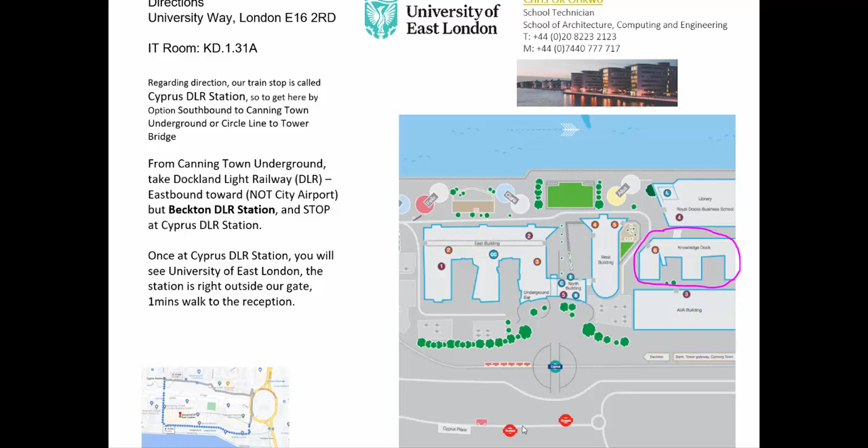Directions, you don't need directions. You have already been there, Patricia, so I don't need to explain where that is. But what I'd like you to do, I don't know if you've got access to these materials, and don't worry about it, I can bring them anyway. For the sketch exercise, you need to bring a layout pad with you, a couple of pencils and some fine liner pens, and a couple of colour marker pens, probably a light yellow or a grey, and that would be brilliant.

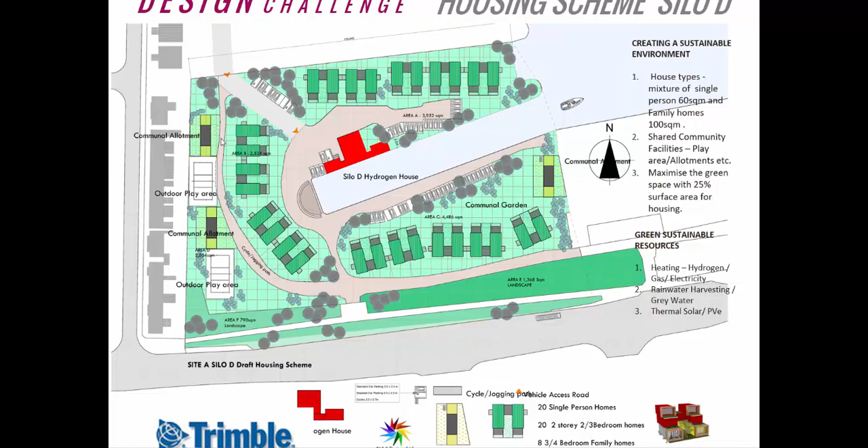Okay, but what we'll end up doing is, this is the site that we looked at last week, and if you remember when we plotted the site out, we had these community gardens. We had 1, 2, we had 3 of them. So what I've done is I've highlighted this one area here itself, and today what we're going to do, we're going to model that up.

So if you want to practice anything beforehand, there's an A4 PDF, and I put a 2-meter grid onto that. I put some scale stuff on there so you understand about sizes and everything else, so you can actually scale out and sketch out your ideas. So like everything else that we do, before we start modeling, we need to actually formulate our ideas on paper first.

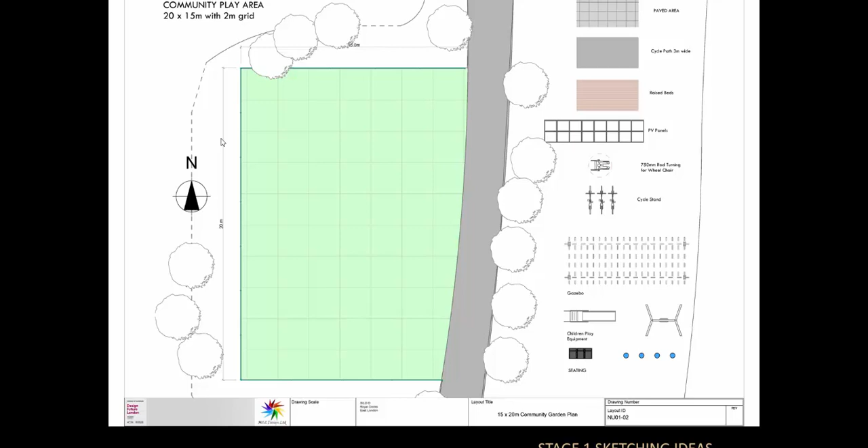So what we're going to do today, we're going to go into SketchUp, we're going to create a community garden. So we're going to have buildings, we're going to have some planters in there, but there are things, when you're designing a community garden, that you need to consider. One of the factors, obviously, we need to create a toilet in there that needs to be compliant with the DDA regulations. We need to consider having washing machines, so we can service that by having grey water and rainwater harvesting.

So by having a sedum roof on the building itself, we can use that to control the water flow when it does rain. We can also use the raised planters to gather the water up, and then we can feed that into an underground tank. We can also include things like permeable paving, so again, it allows for water to filter through. We can create spaces for cycle stands, add some benches and seating and probably a gazebo, and include a children's play area, all within that zone itself.

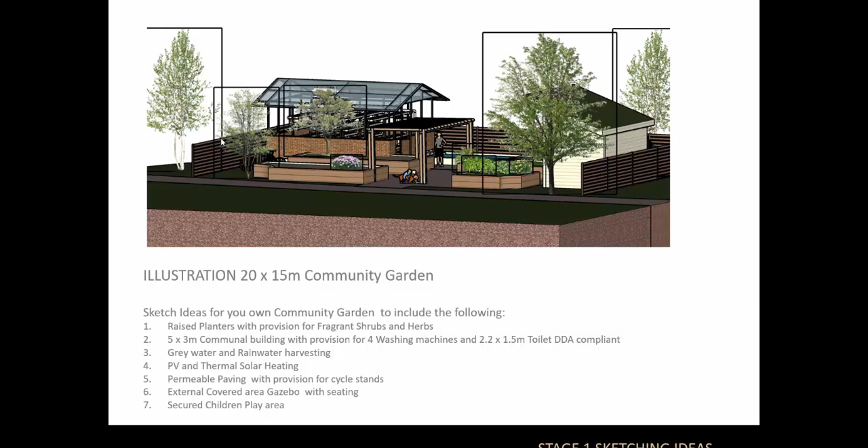So, this is one little idea that I came up with, where we have our bike stands, we have our footpath, we have our planters. At the end here, I've got some PVs, solar collectors, and underneath these planters are a series of rainwater harvesting tanks that will gather the water up, and therefore we can use that for flushing the toilets and for the washing machines. And likewise, we can take the water from the washing machines and also use that for flushing the toilets as well. So the whole thing literally becomes self-servicing in a lot of senses.

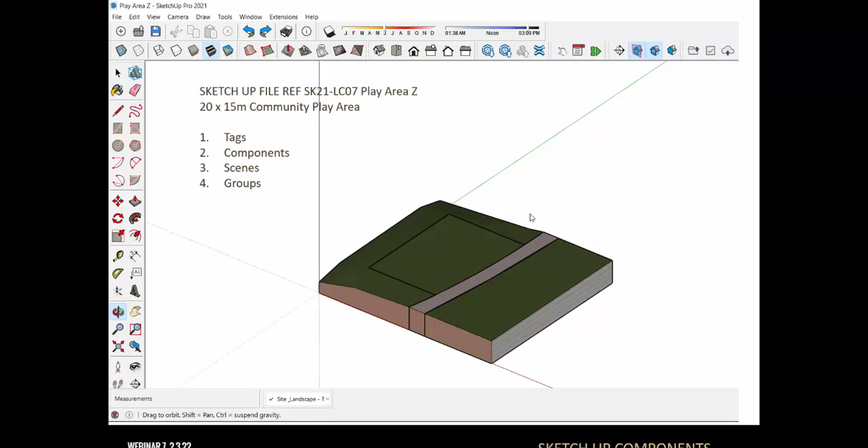So where we're going to start off with, there is a model file which I've created, which has got the area, the rectangle here, which is 15 meters by 20 meters. There's a footpath on the model itself, and then put a bit of landscaping around the space. And so what we're going to do, we need to look at the tags, the components, the scenes, and the groups. First thing that we need to think about is to just check the model information is correct.

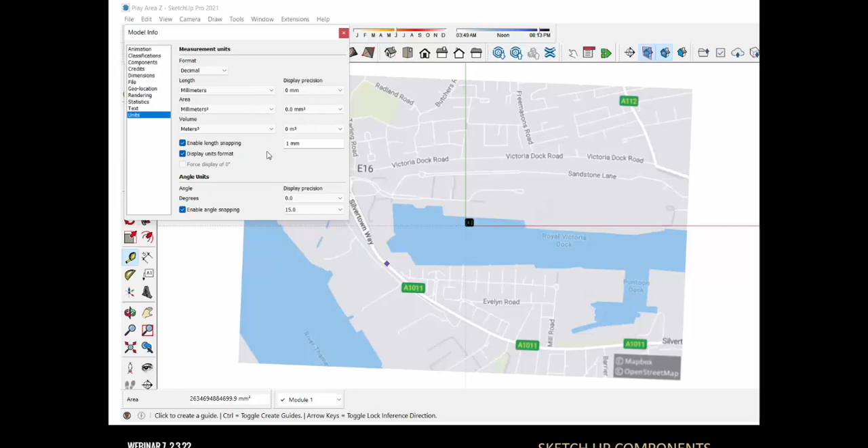And so by going into model information and going to the units, we can change the format to decimal, and then we can choose the lengths, the areas, and the volumes. And then we can actually decipher the precision for each of those.

Other things that we can do is we can actually focus on the geolocation, so that when we are doing analysis, we can actually bring our model and pinpoint it exactly where it wants to be from a geological point of view. And so by going on to geolocation, we can actually type in the area that we want to, it allows us to scroll into it,

and then you can see here is the Docklands area itself. Our site area is down here, so we'll just simply drag it so that it positions it within our model, and then we'll just add that to our model itself. And so we can actually create that within the model itself. It's there, but we can control the tags. We can actually lose it within the tags, so we can control exactly what we're seeing.

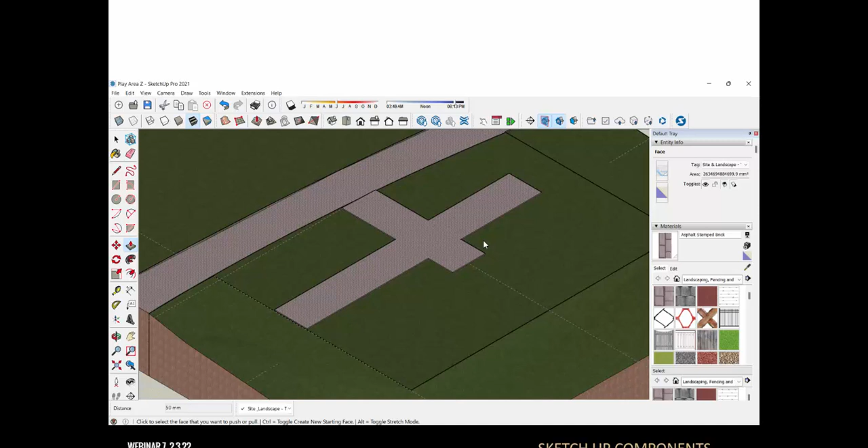So the first things that we're going to start doing is actually modeling up where the footpath's going to be. So by using the tape measure, we can define where the center points are, and then we can use the pencil tool to actually set out where the footpath's going to be. And then we can elevate the footpath up, and then add the material to it, and then we can actually do a little bit of stretching to extend exactly where we want it to be.

So we go through this kind of process where we can have this kind of space. So my footpaths are all 2.4 meters wide. I've got a length down one side which is about 9 meters. I've extended out the other side by another 3 meters. So that's the kind of thing that you can do. Then you can put it out from there.

To create the planters, again, we can use the tape measure tool to actually define our setting out points. We can extract areas out, and then once we've got the planters itself, we can then elevate them up. But before we do that, we might want to do a bit of editing to get the shape right. So we might start off with a rectangle, but we can actually turn them into different shapes.

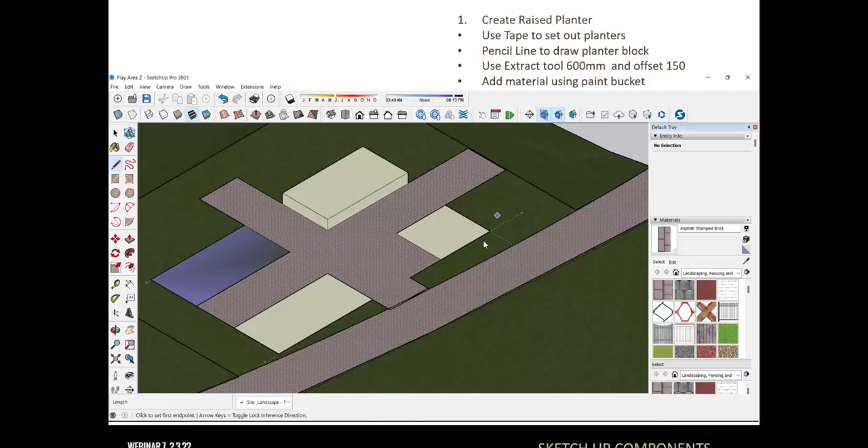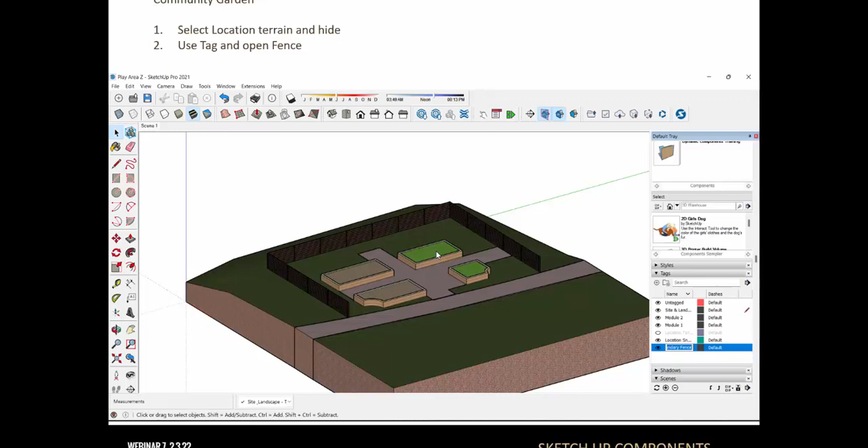And so if you look at the illustration, I have 4 planters here. These two have this kind of curved end, and the other 2 are left rectangular. And so by extruding it and then using the offset tool, we can then create the planter and then just apply our materials to it.

Importing materials is basically by going into the 3D Warehouse. So for today's exercise, I've gone for a playground, and so literally by going to the 3D Warehouse, typing in play equipment, selecting the one you want, you can import it directly into the model itself.

So likewise, we can then create all this. We can use some objects, which I've already created and put into the base file itself. So for example, the fencing that goes around, I've already dropped that in. This little tiny building, this little gazebo, I've actually created and added that to the base file. So it just saves you from having to do that.

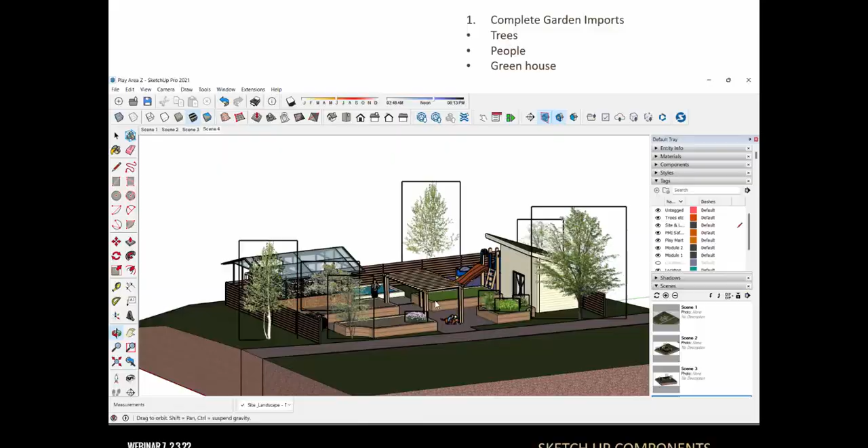And then we can go into the scenes and we can create 4 scenes, so we can actually view through it, and that will then compile our composition for our model. Okay, I'll come back to this little video at the very end.

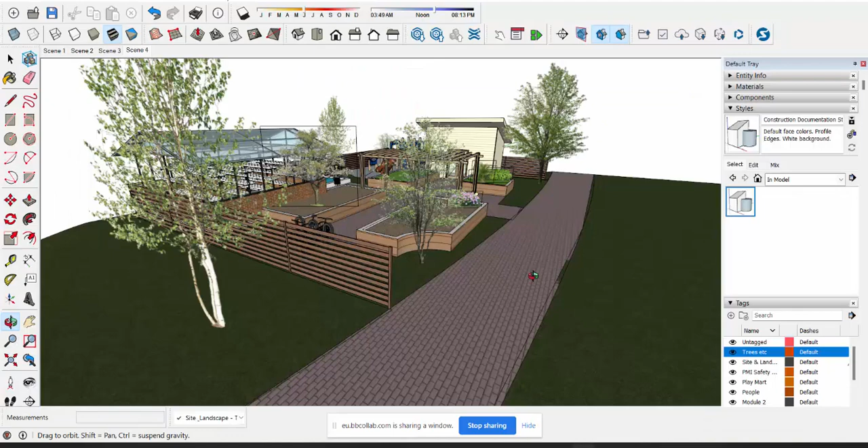Okay, so let me just end that show. Let me come into, right. So here is our completed model that I've created.

So what I'm going to do is, if we look at what we have, we've got a series of layouts, and if I rotate through, we have all these trees. Because they are 2D objects, they're always designed to face the camera. So as we rotate, those trees will always face the camera at all times.

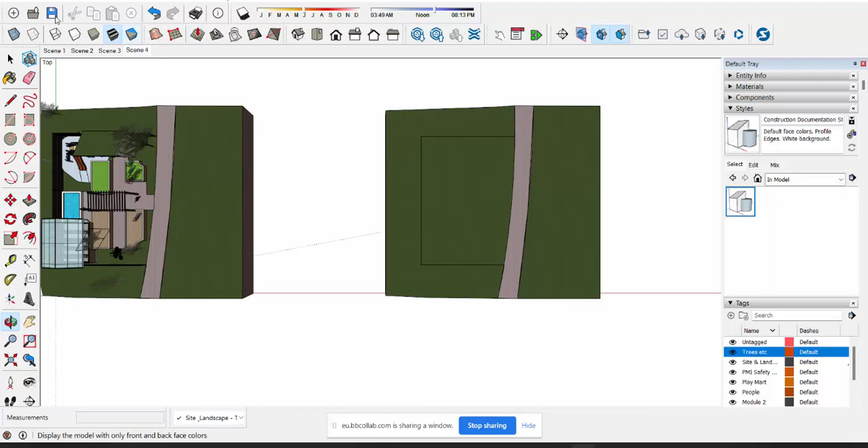Right, so we're just going to go to the top drawing. There's my finished model, and here's one, as you say, that I created earlier. I'm just going to go back to my camera tool and drop into parallel projection, so I'm looking directly on the top. Let me go through a little bit of basics, which I talked about earlier on. One of the things we need to check, particularly when we import a model, is that the settings are correct for it.

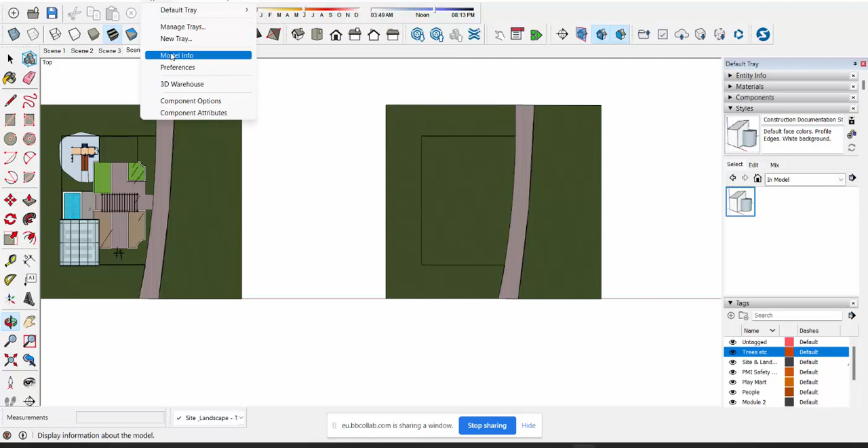So if I go into Window and into Model Info, you can see there are things we can adjust. We have the Dimension tool, so I can choose the dimensions. On the Dimension tool we need to make sure they are always aligned above the line. Sometimes in America they have it underneath or through the middle, but here in the UK the dimensions are always above the line.

The other thing regarding the units is to make sure of the units we're using. The default might be architectural, but if I go into architectural, you see everything is imperial. So I need to change from architectural to decimal, and now I have lengths in millimeters, areas in meters, and volume in meters. Let me just change that to meter square, and then levels of precision. To be honest with you, when you're working in millimeters, you don't need to go 6 points beyond it. It's not necessary. So we can focus on each of those and set it up properly.

The other thing we need to think about, particularly when we start carrying out analysis of the site itself, is that we can select the location. We can click to clear the location, add more imagery to the location, or set that location. I'm not going to go into that right now; we can touch on that in more depth next week in the workshop.

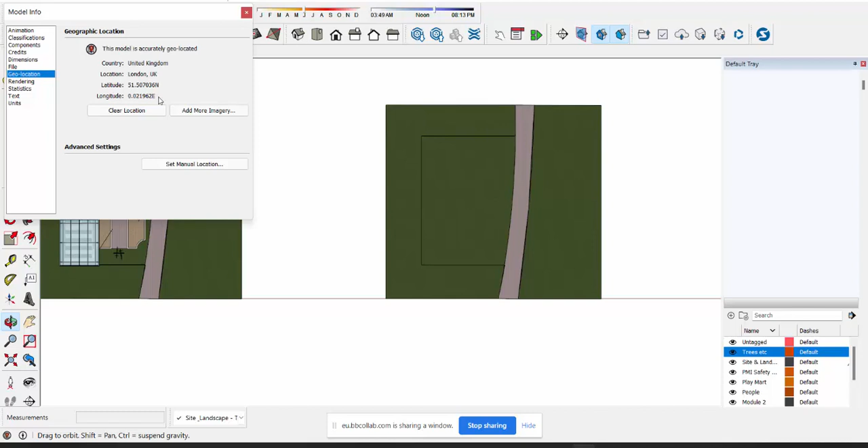But predominantly, this is critical. Regarding the site we've selected, you can see we have a latitude and a longitude setting. When we carry out sun studies and environmental assessments, that is vastly important. If we don't have that, then it's not in the right place. So that's just a couple of things regarding the model info.

Right, okay. So let's start modeling up this site a little bit. I'm going to run a couple of dimensions on the side just to show you what we have. Let me click dimension and bring it to there. It's 14.2 meters. It's always good to check your dimensions. So it's fairly accurate. I want to use that for check purposes. Don't keep your dimensions on. Literally, just get rid of them. So that's the first thing.

The second thing I want to do is get a center point. If I use the tape measure tool, you can see it picks up that center point, and then I can pick it up from there to there and bring a line across. So I can judge where my center points are going to be from my model at any one time.

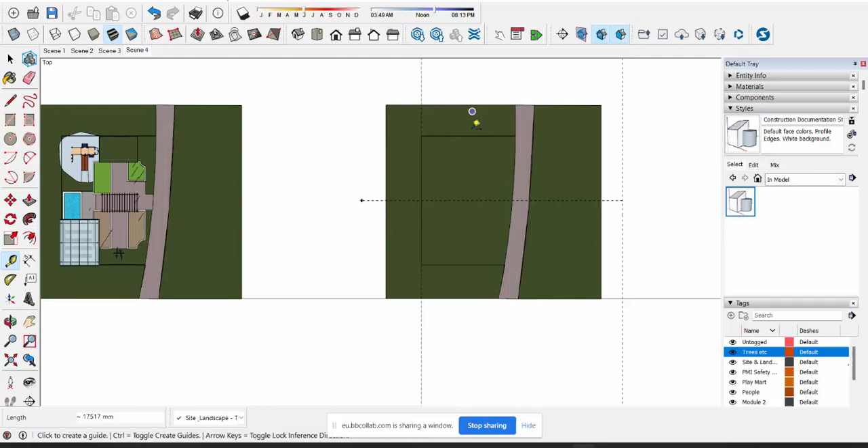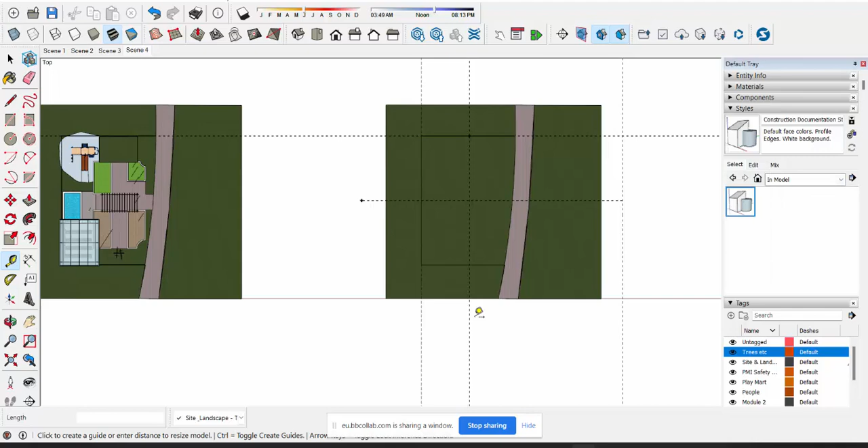I can be specific. I can come from the edge and say, right, let me come in 7500 and type enter. It's giving me my center point from there, and I can bring in my next center point from there. So there are two ways of bringing dimensions in, and that's because I want to have a footpath that's going to be within the center of my model itself.

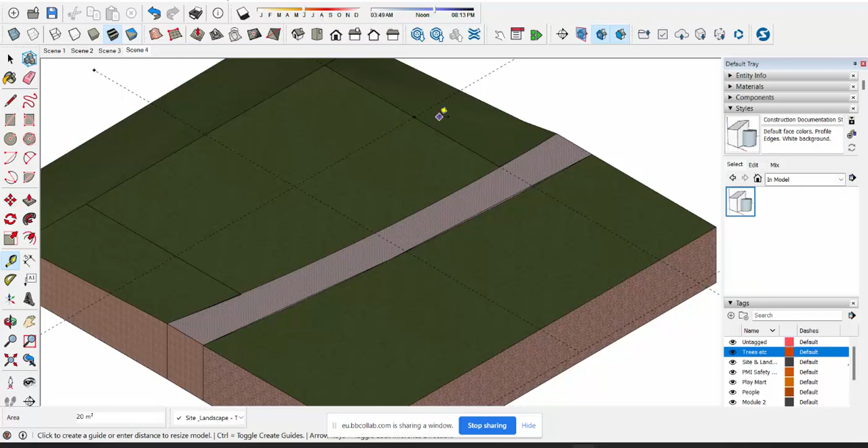So if I look at this in 3D view, you can see we have these default lines that I can model through. Now I can keep in 3D, or I can go into 2D, back to the plan view, and apply my pen line.

So if I go to the pen line here, if I start from this point, let me come along the center point there of 1,200 and hit enter. You can see now I'm going to use my green lines. That line there is 9.9 meters long.

So I can come to that point itself. Let me come way beyond that, some in the region of about 16 meters that way, and 0, enter. I'm going to come back with a dotted line, come on again, another 1,200, enter. Consequently, this gives me my space.

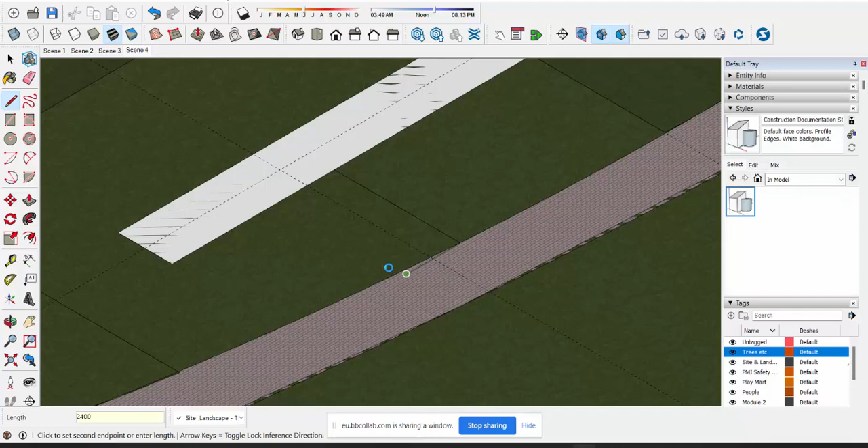Okay, let me continue. Let me come on this side, 1.2, from there to here. I'm not too concerned about overlapping the footpath, 2,400, enter, and then I can go back from there to get into the edge.

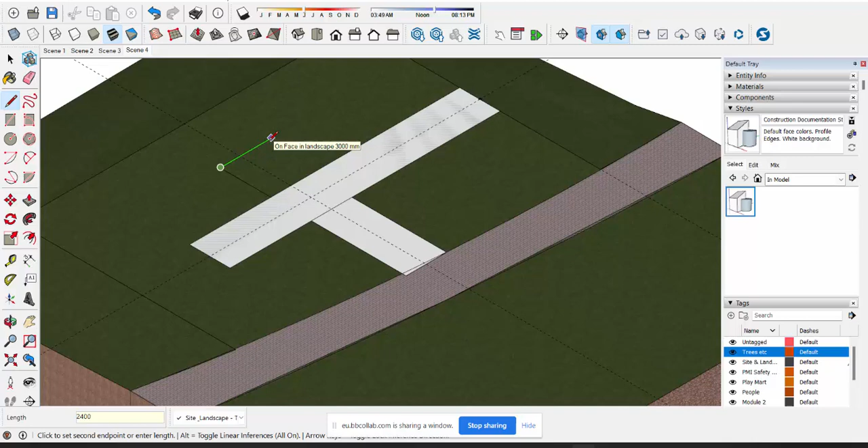Again, I could come up the back end, so let me come up the back end here of 3,000, enter, let me come through, 2,400, enter. So consequently what I'm doing is being quite specific regarding the shapes I've got. If I decide to erase that little line, that little line, and that line, it gives me this kind of shape.

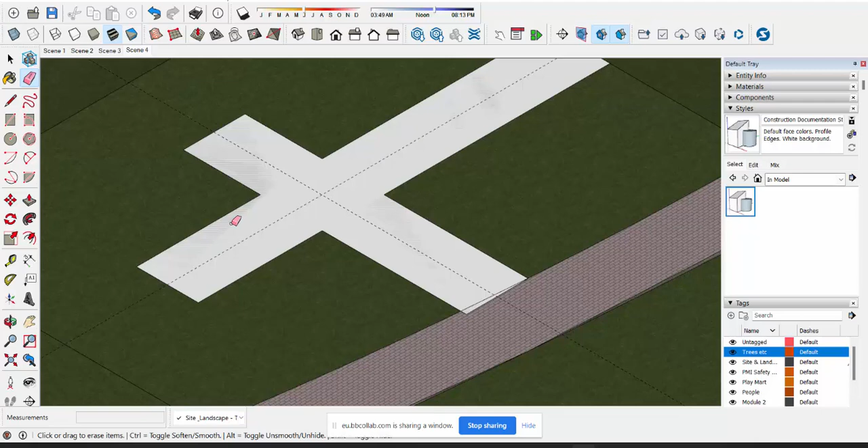If I choose, I want to actually curve the end a bit. I'm getting very cocksure with myself here now, and there you go, I can put a radius onto the end. So you don't need to be in squares, but one thing you do need to make sure is that when you extend spaces, you do extend them through.

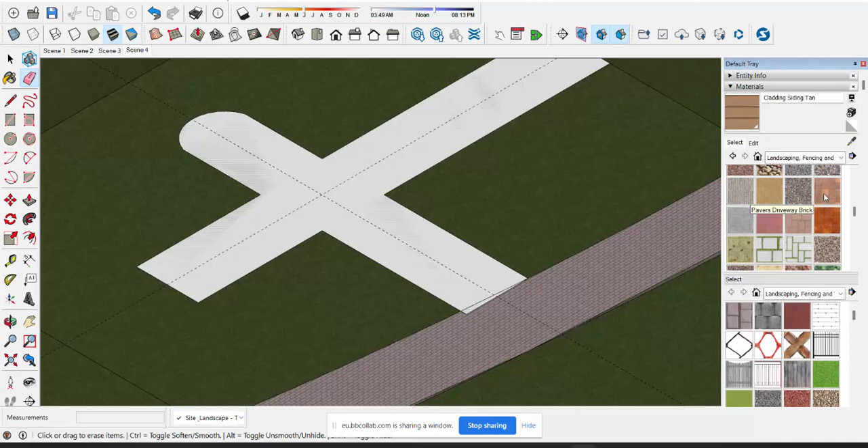So if I go to my materials, let me go from building cladding to landscape surfacing, and I'm just going to pick a slightly different material from the one that will be used outside. I'm going to pick pavers, driveways, that's fine, that's going to do me, and I'm going to click on it. Voila, I've got all my material for my footpath.

Then what I'm just going to do is lift it up, pull it up some in the region of about 50 millimeters. Notice everything I'm doing is actually all in millimeters. If I wanted to extend some of the paving through, let me rotate my model itself.

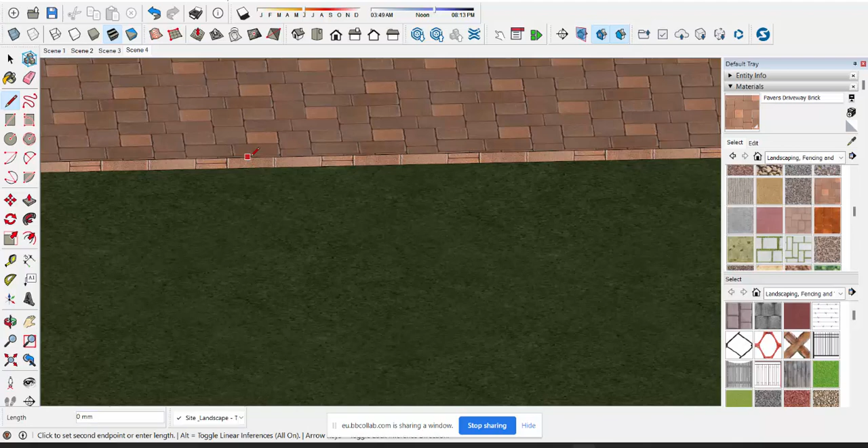Let me just take a line out. I'm just going to drop a line, I want a blue line, excuse me. Fine, what I'm going to do is I'm going to pull it. So you see I have an edge here, I can pull that edge that little bit further forward now. So you have the choice of going in 2D and 3D to actually manipulate the size and the shape of your paving area itself.

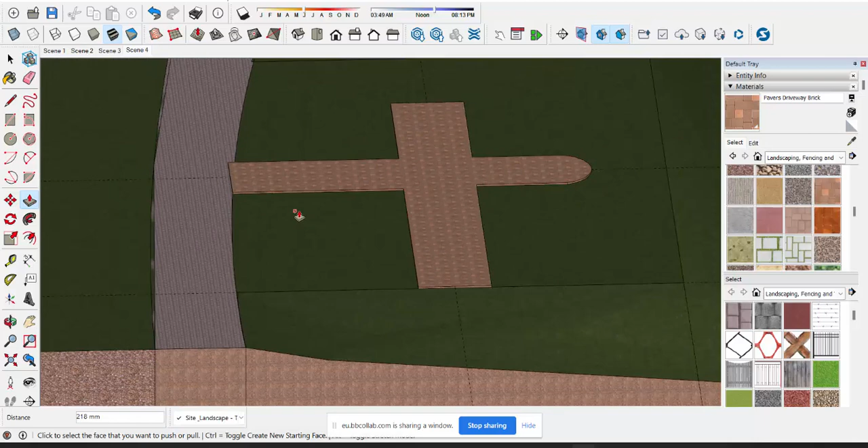Okay, fine, so let us just come back onto the plan view so you can see that we have that kind of space. Let me go into 3D, let me just model it through a wee bit more. Oops daisy, escape that. Bingo. Right.

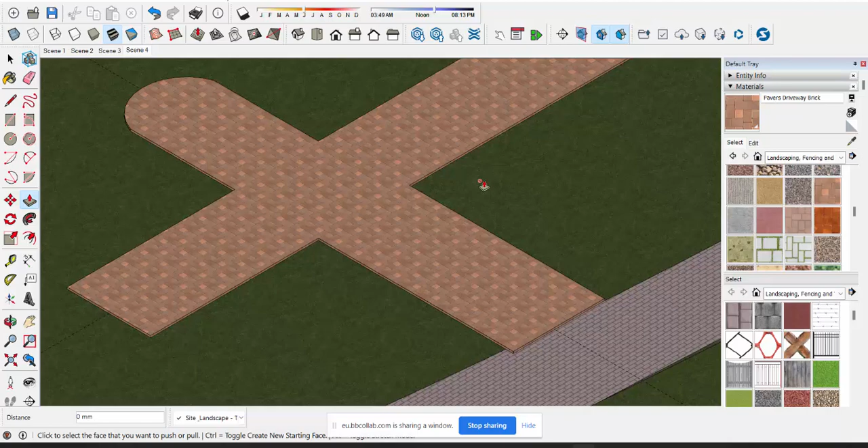So what I'm going to do now is I want to actually add some planters to each of these spaces itself. So if I rotate it round, okay, again I can use the line tool. I want to select it at this point, so let me come along to the bottom edge here, let me come along 6 meters, that point.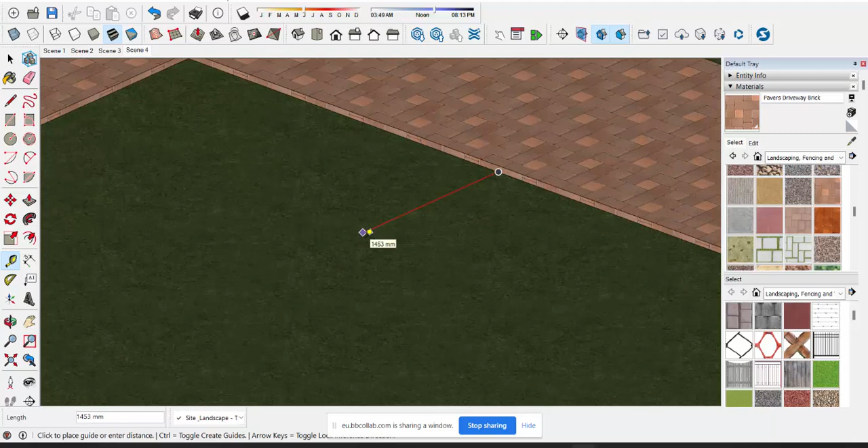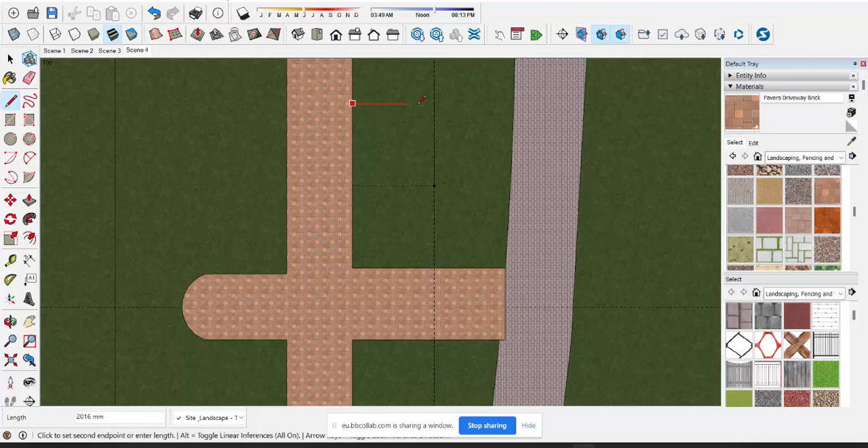And so if I look at this on 2D from the top view, you can see where my lines are. There we go, fine, that's what I was looking for. So if I put a pencil line into here, to there, come down to that side, you can see that I have one planter into that space.

Let's have a look at that in 3D. It's down here on the ground. Let me go back into the plan view, let me just take the tape measure tool. Escape. That wasn't the tape measure tool, that was the line tool. Tape measure tool.

Because bear in mind, we're using the tape measure tool for one reason only, and that is just so that we can actually be accurate. Let me make that 3,000.

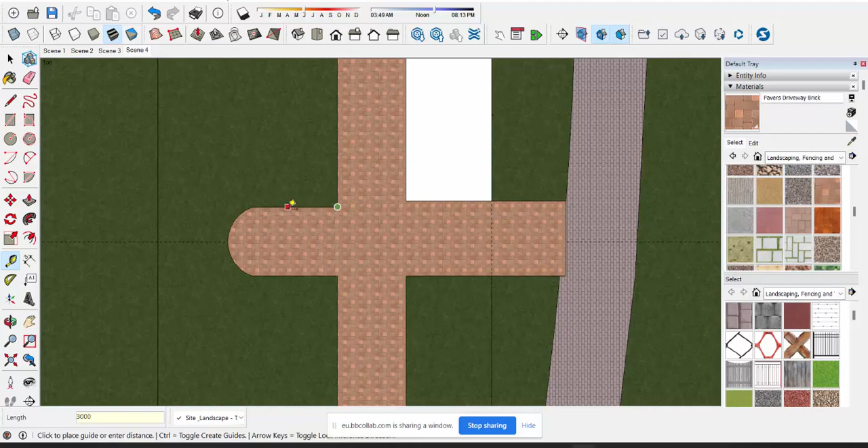So consequently what I'm doing, I'm just using the tape measure here just to map out my areas within my planter itself.

Okay, so what I can do is take that in 3D. I can then apply my lines to here. Do the same to that one. And simply now I have my 3 areas.

If I wanted to go in, I no longer require those kind of guidelines. So let me just go to edit and delete guides.

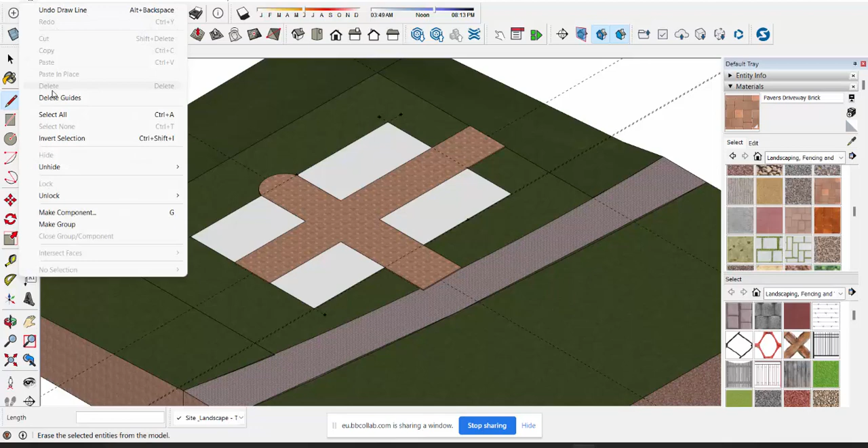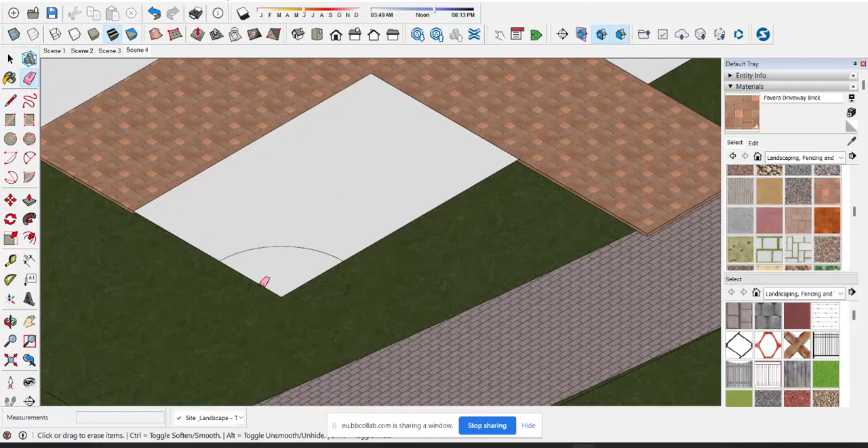And now what I'm going to do is round this corner off onto here. So if I use the arc tool before I extrude, let me come along and then use the eraser to get rid of the bit that I don't want. Similar to that, let me do the same onto the other side.

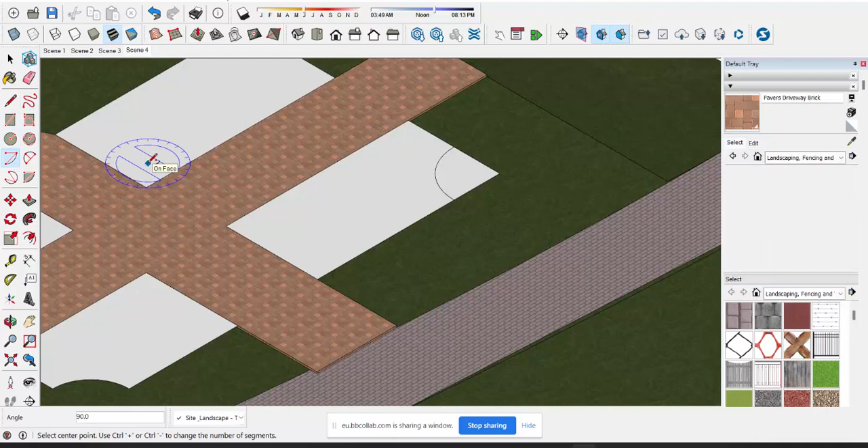So any shapes that you're going to change, you really want to do before you actually start extruding it up, okay? Because this is a 3D object, so at the moment we've just created something fairly flat. I don't need to do other things, I'm just going to keep this for the time being. But the point is we can use the squiggle tools, the line tools, we can manipulate those lines to create whatever we want. But the important thing is that you want to do it before you start extruding upwards.

So what I'm going to do is push. Let me pull this planter up to a height of 600 millimeters.

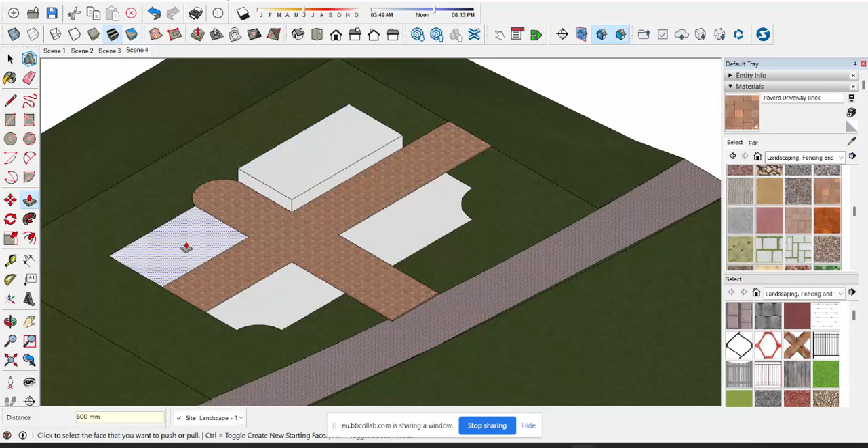One of the things we want to think about is the reason why we're creating raised planters. Two reasons, right - if you're trying to create a space which is inclusive for all. One thing we find, if you go to a supermarket, is that sometimes they have stuff at a very low shelf, and stuff at a very high shelf. What was actually defined as the optimum height of product in supermarkets for all ages is anything between 450 millimeters up to 1350. Anything higher or lower than that, people have issues, particularly as they get older. And it infuriates me when I go into supermarkets and see shelves literally above 2 meters high with product on them - that is just dangerous. But it's the life, the world that we have at the moment. So enough of the history.

600 mil, and let me pull the last one up, and let's make that one 600 millimeters as well. Okay, enter. Next, I can apply my material to all of this at once, or I can apply them to the various edges.

I'll do that one in a second. So let me offset the edge. Let me pull the offset in. So let's just make the thickness of this planter 200 millimeters. Do the same here.

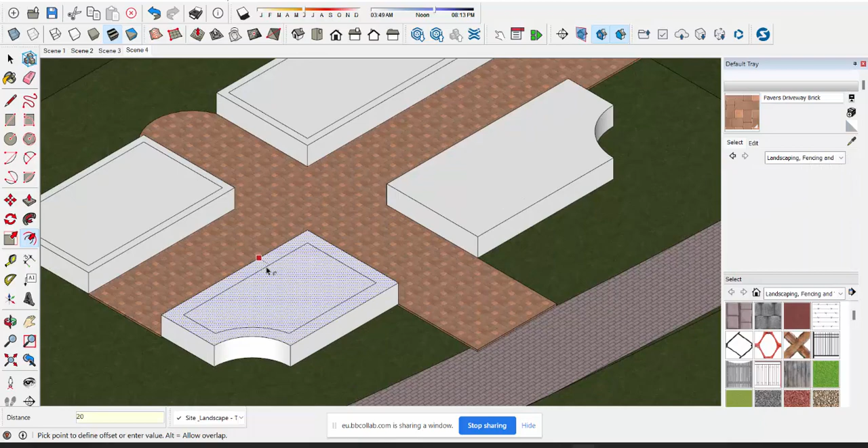So you can see it's highlighting when I'm selecting the surface. And because I've got this curve into it, you see what it's doing - it's actually bringing it nicely within those parameters. So I'd have to think about what the difference is. Let me just take the top surface and push it down, probably about 75 millimeters. Let me do that to all of them.

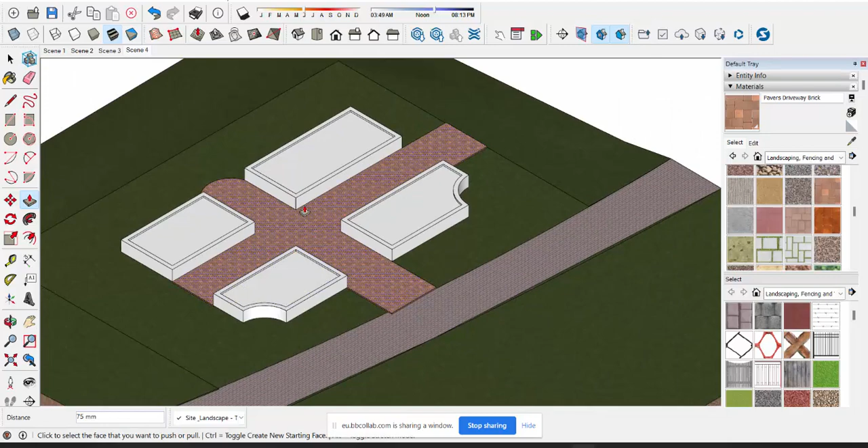I'm sure Mita's going to tell me there's a shortcut for all of this. There is, yeah, there is. Well, fine, you tell me this tomorrow. 75 millimeters, yeah. So what's the shortcut, Mita? What should I have done? Just double click - once you do a command with the push pull, if it's the same command you want to use on one of the other planters, all you have to do is double click it. Right, it remembers your last command. It does, right. Okay, thank you.

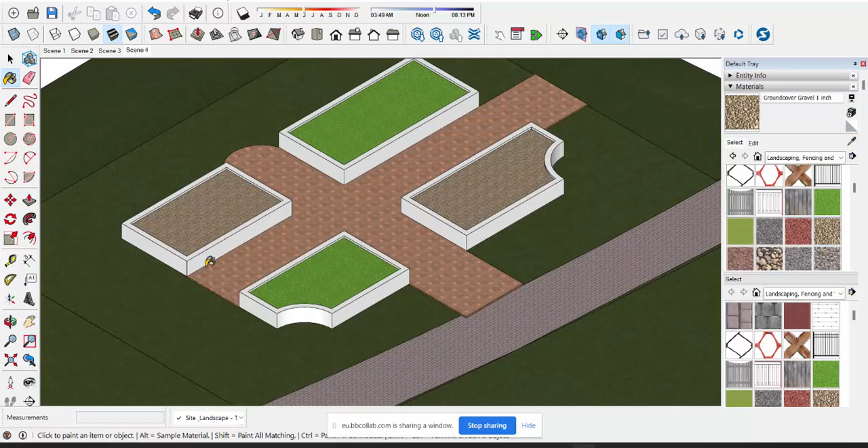Well, I'll remember that. So consequently then, if I take the paint bucket, let me go from that. Let me just go to cladding and siding. Let me just take something like that cladding material, and apply it to that surface.

I can just click on and surface all of those - hold the shift key down and it will select them all. So hold the shift key, that'll do them all. Yes. So go to a white surface - yeah, like that, round, that's it.

Fantastic, there you go, thank you Mita. That's what makes Mita - that's why Mita's the expert, and I'm just the learner.

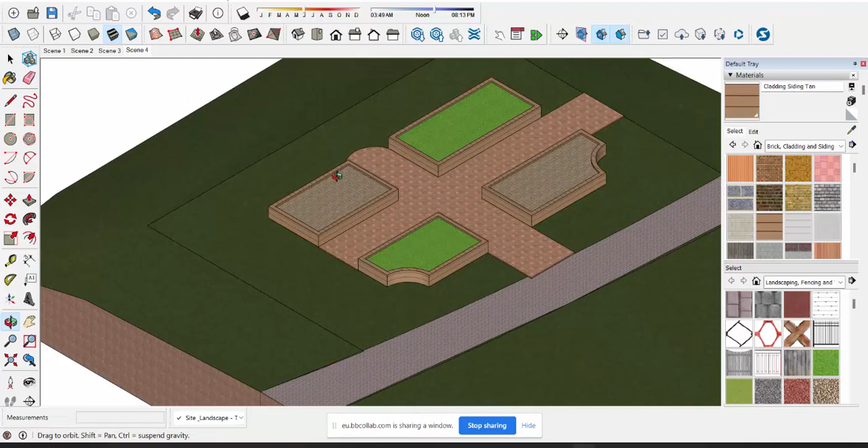So there are our planters that we have within the model itself. Okay, so we've got our basic structure.

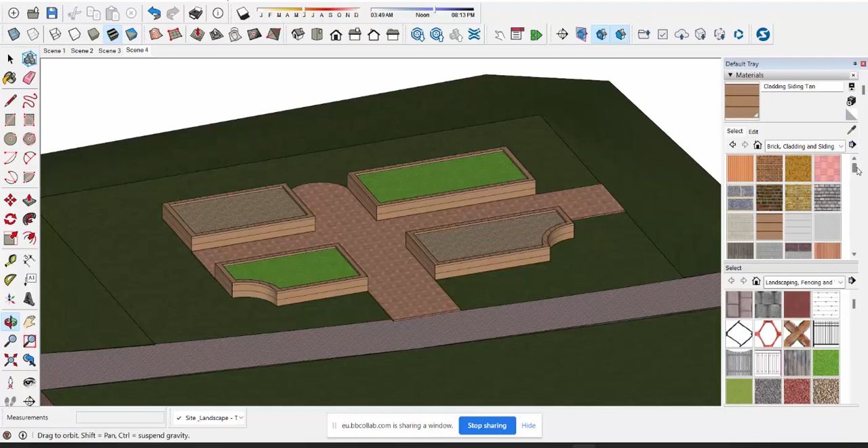So what I'm going to do now is populate this model with some of the objects which I brought in. Let us just go into... reduce materials down, let me go into this.

The other thing you'll notice if you look at my tags, I've got one for site landscape, one for the play area, and one for people.

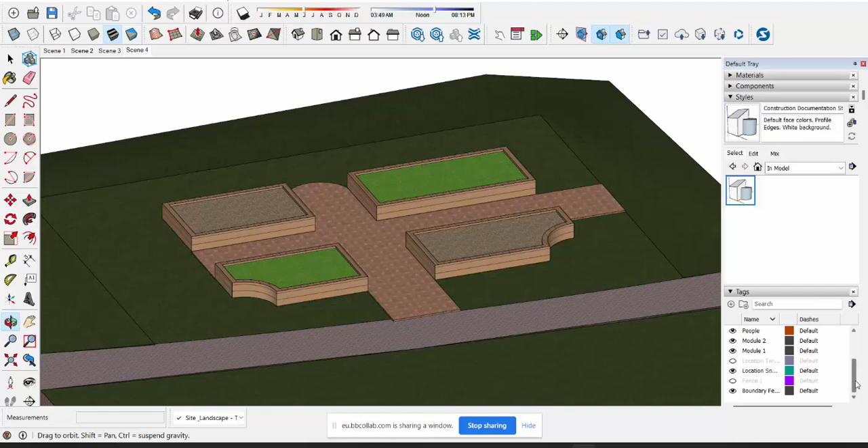I've got the geolocation one switched off at the moment. If I switch that back on again, and just scroll out and come back onto plan view, you can see this is my second model. On my first model, I've got it located exactly where my site is. Can you see there is the site for the Royal Docks with our garden positioned exactly where we want it to be as far as geolocation is concerned. So I'm just going to switch that back off again.

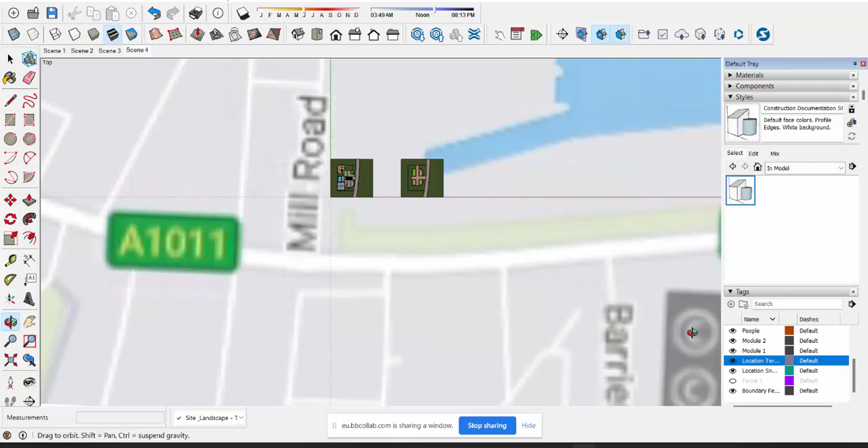So the great thing about using the tags is it gives us a lot greater control.

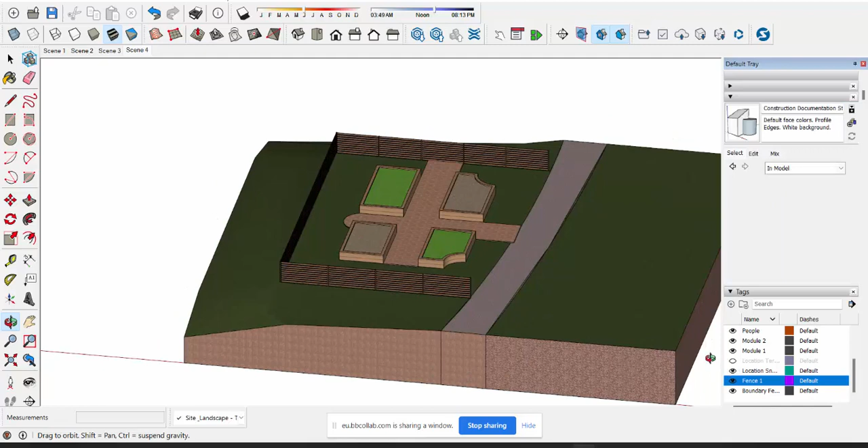Likewise, in the model I created, I put a boundary fence onto it, temporarily, so that I can model stuff up and get into it, be where I want to be. I can actually locate my fence and see exactly where - I can take it out, I can bring it back in again.

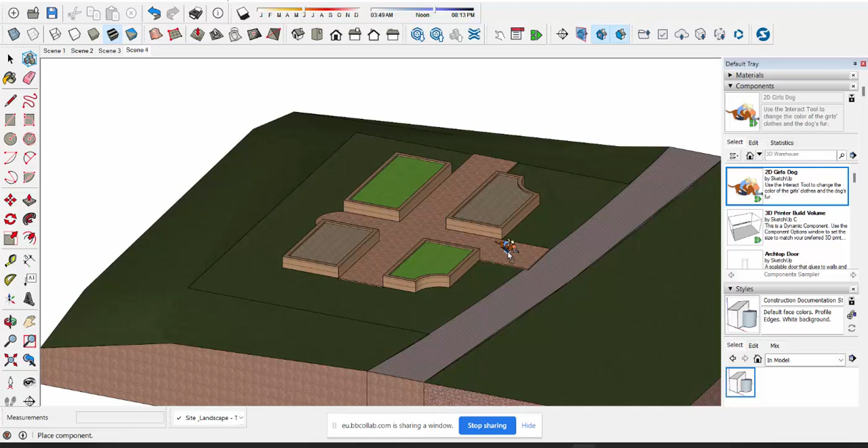Couple more things that we're going to do. So in my components file, if I go to components, what happens is we've already got people into the components. Let me just bring this little group that I have brought into the files. Let me see what other things I've got in here.

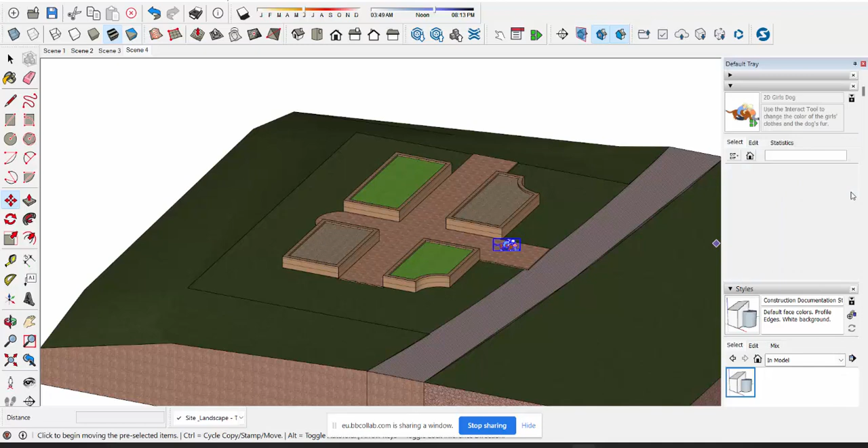There's some bicycles in there somewhere. Where have they gone to? Bicycles... come on... fine, there we are, okay.

So what happens is we can put these within the position of our model, and the factor is we can rotate them to make sure that they are exactly set within it. And you see what happens - look at the children with the dog - as we rotate, they're always facing the camera. Obviously, the 3D objects are 3D objects, but we have that.

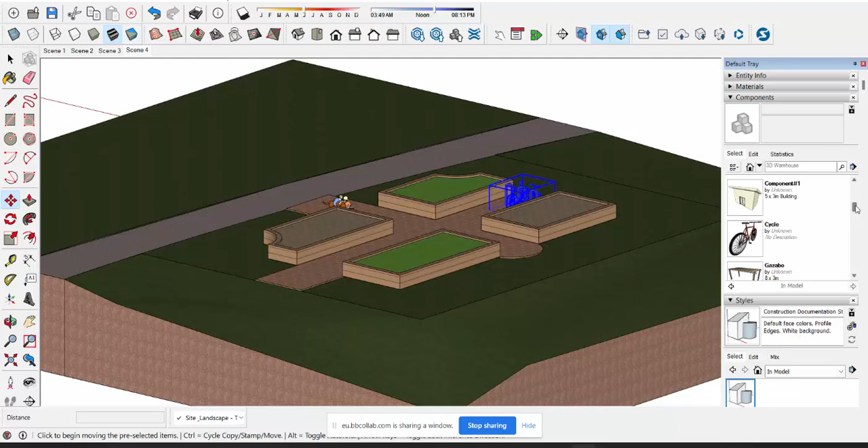Let me bring in some other components. I also created a little house as well. I seem to have lost my house a little bit. There we go, fine, so there's the house. So I can bring that and site it within my model.

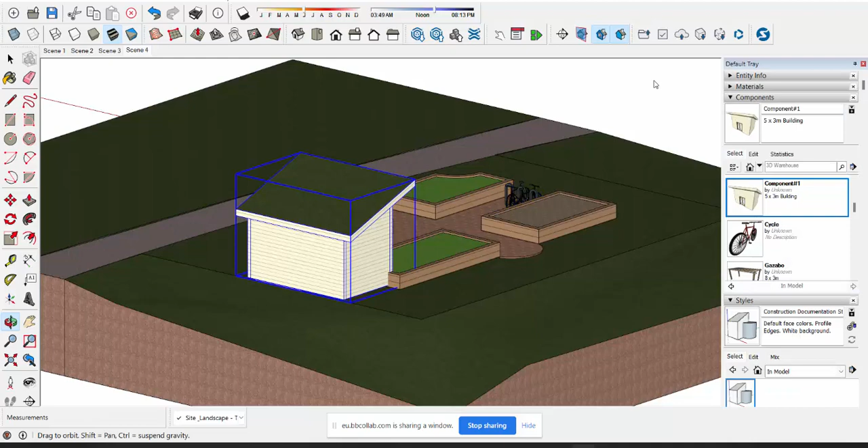So I can drop it and drag it and position the house itself. Let me just check it - this is a house which I made earlier on. Okay, so I may need to move it back a wee bit, I may need to actually change its size. So let me just drag it across.

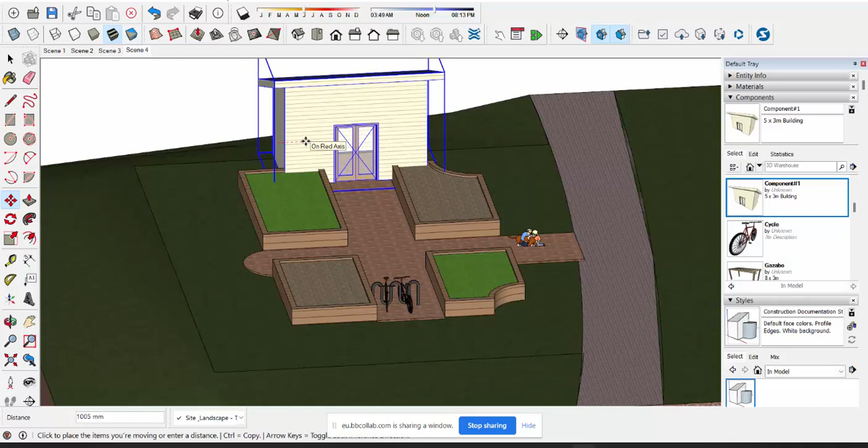Okay, so perhaps what I've done is I've probably made these planters a bit too big, but I can push the object back. I think you get the gist as to what I'm trying to do - we could have made a model off-site and made our own model.

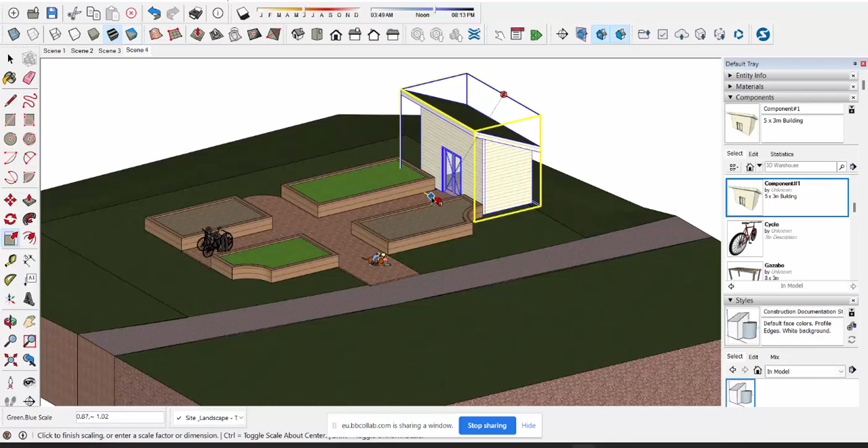I've done that just for convenience for today, so consequently I can edit this planter, and I can also, if I go into the model itself and click onto scale, you can see what it enables me to do - I can scale my model back so I can make it fit within the space that I have. Likewise, I can drag it and extend it outwards on both sides. Let me just rotate around, yeah.

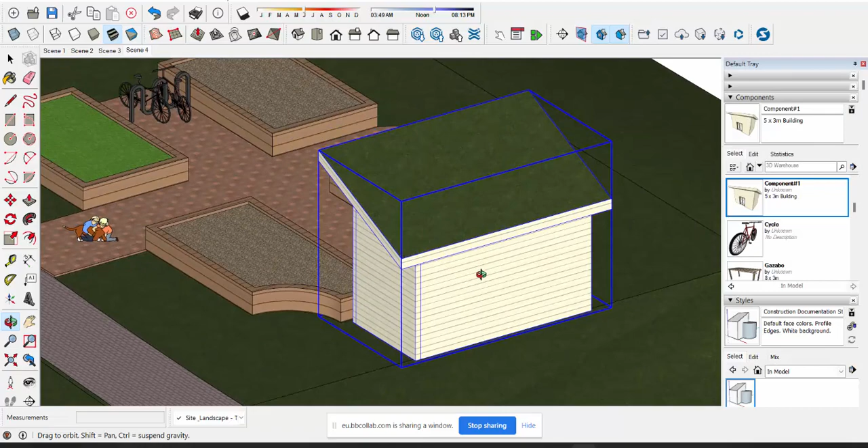So let me just... okay, so I have my little tiny shed. The principle behind this is to create a washing area with a toilet inside, so it needs to be big enough to accommodate the space. And so I have my little shed.

And then finally, before we finish populating the scene itself, I'll go back to the one I've already created, and I'm just going to drag stuff across from the other model that I've created.

So if I want to import a play area, I go to the 3D warehouse and type in playground equipment. I'm going to go for a slightly different one than I did last time - this is the one I brought into the other model, let me bring this one in instead. Let me go download. It asks if I want to load this directly into my SketchUp model - yes, I do.

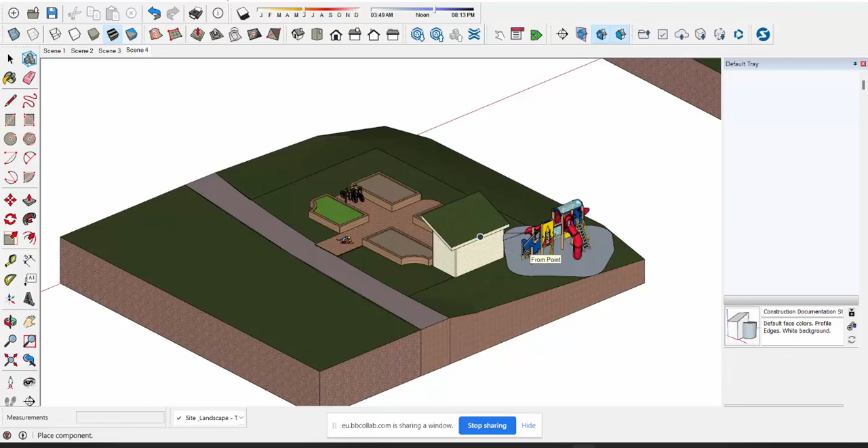And you can see I have this play area, which is probably a bit bigger than the one I had before. Okay. So I can get it, I can position it, I can actually drop it into place itself. Okay. And so I can allocate it. And so you see where this one is located. I need to bring it down. And I can set it within my model itself. Okay.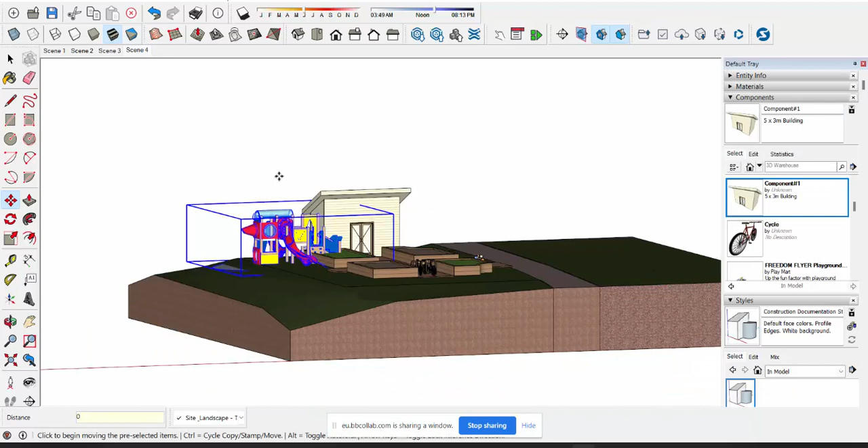I can edit the scale. I can shrink it down a wee bit. Okay. So that's how we bring it in. Let me just delete this one. And what I'm going to do is, let me just go back in and let me open up my tags. Components down, and let me put in down here. Let me put the fence back in again.

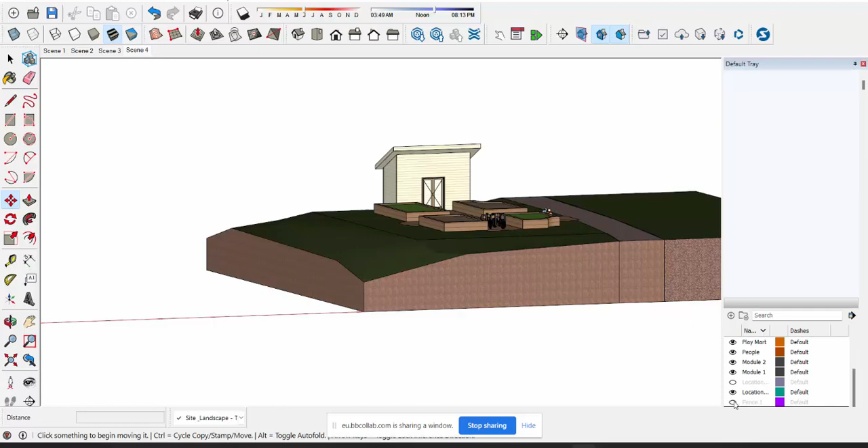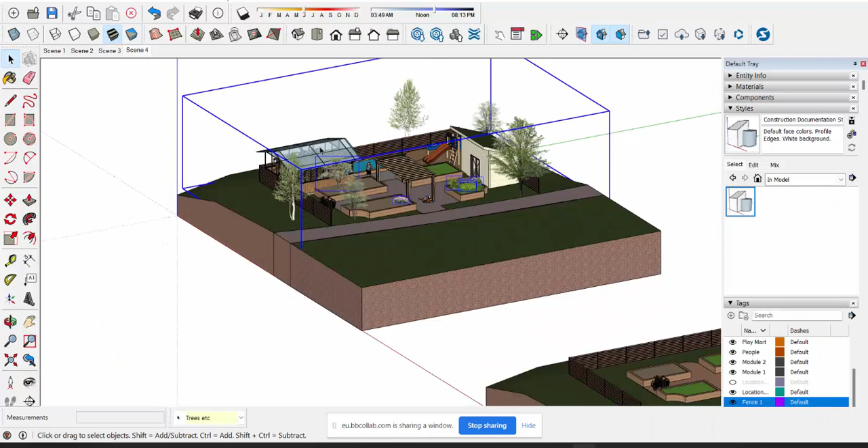Voila. Okay. So you can see that what I have now, I have my fence. Within there, I have my object. I can bring in more people into the scene. And so eventually what happens is, if I look at the one that I've already created, you can see that I have all these trees. So let me move, let me edit, let me copy, let me edit and paste. And so I have the trees which I can push into place.

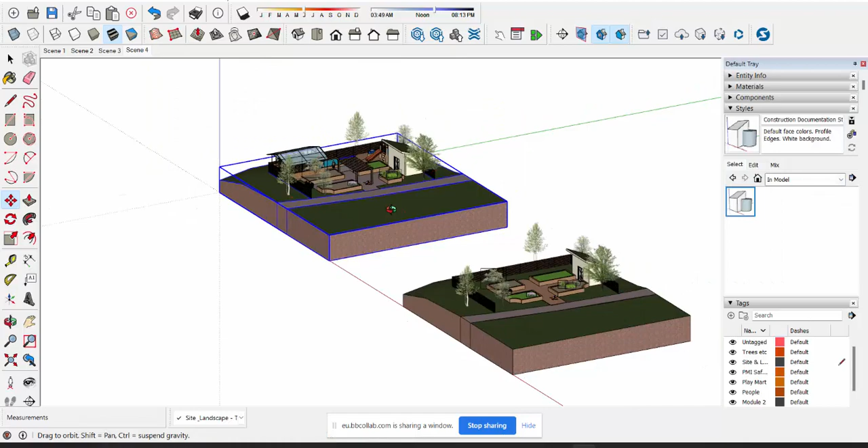Let me go back and do a bit closer. Voila. Okay. So I have all those trees within the model. Let me do the same. Let me hit escape. And now I can do the same with my greenhouse, and I can bring my children's play area. So consequently what happens is that we can populate our model very quickly.

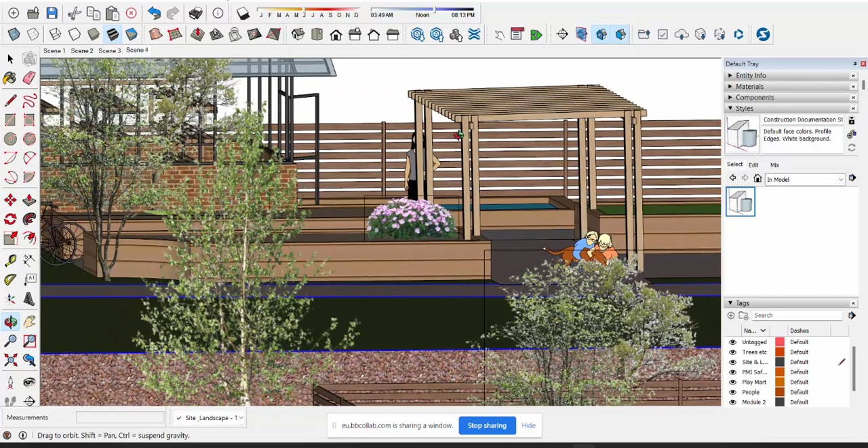So here we are, we have the scene. We start off with the sketch work, we've got our materials, and we have people within there. So if I go to each of my scenes, there we go. I have each of those areas. Now, one of the things that you will notice is that when we brought these objects in, all these trees actually had a bounding box. So you see that this tree here has still got its bounding box onto it.

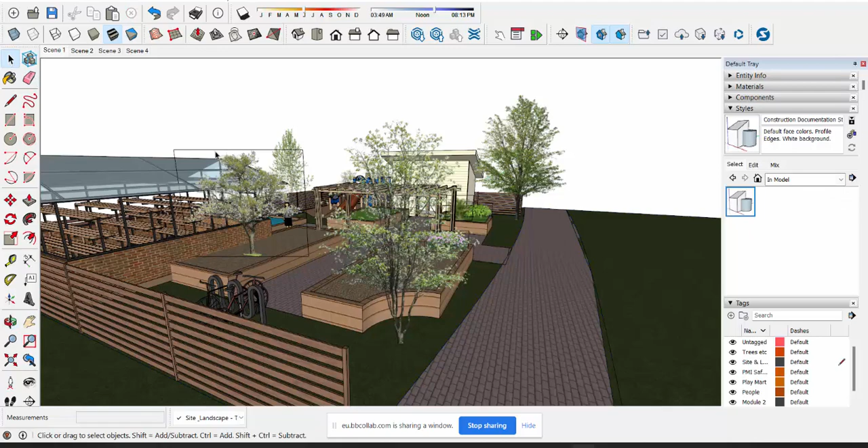So if I go into edit component, and if I select this one and hit the shift key down, Meter's going to correct me now. Okay. You're still not in the component. I'm still not in the component. Thank you, Meter. That's it now. Now double click. Double click the tree. Hold my shift key down, use the eraser. And I bet this is going to delete my tree. Right, okay. So I've done that.

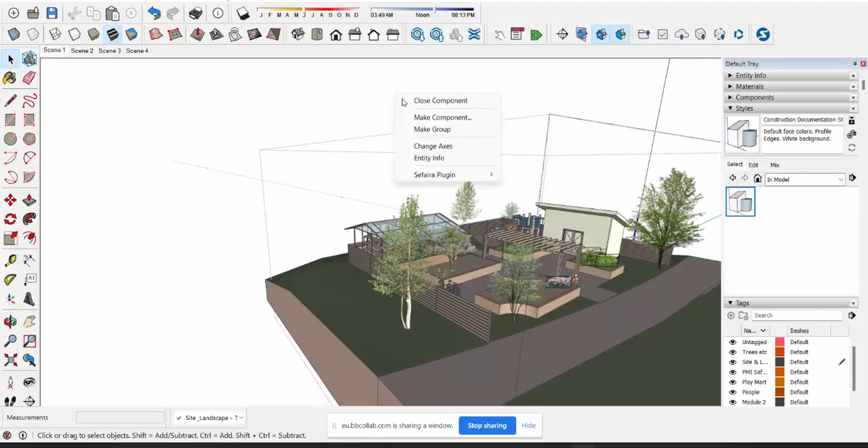Now I hit escape. Now space bar and then escape. Voila. And then escape. There you go. Perfect. You see? Thank you, Meter. And hit escape again. And close component. There we go. Okay, so you can see that my tree has no longer got those lines onto it. And that's how you get rid of them, guys. Okay?

Thank you. Right. Thank you, Meter. You're a star. You're welcome.

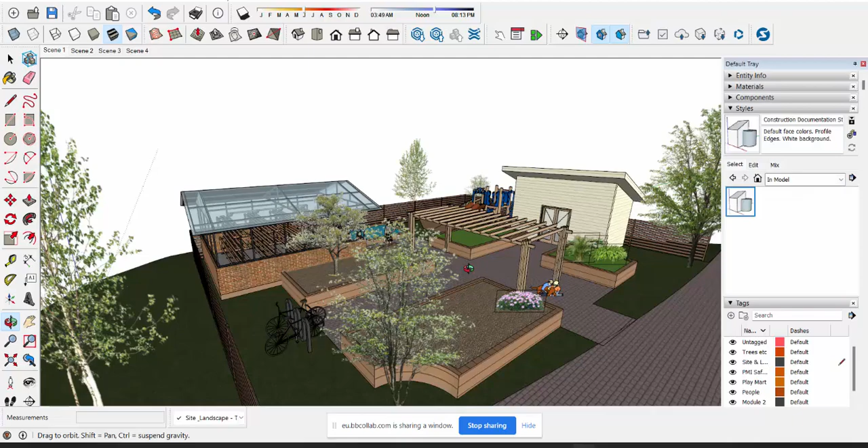Okay, fine. So that concludes our little webinar for today. Let me just play this because it's about 6 minutes long. This is the Northern Gas Hydrogen Home. So there are a series of links. YouTube tell you about the project itself, which I hope will be of value to you.

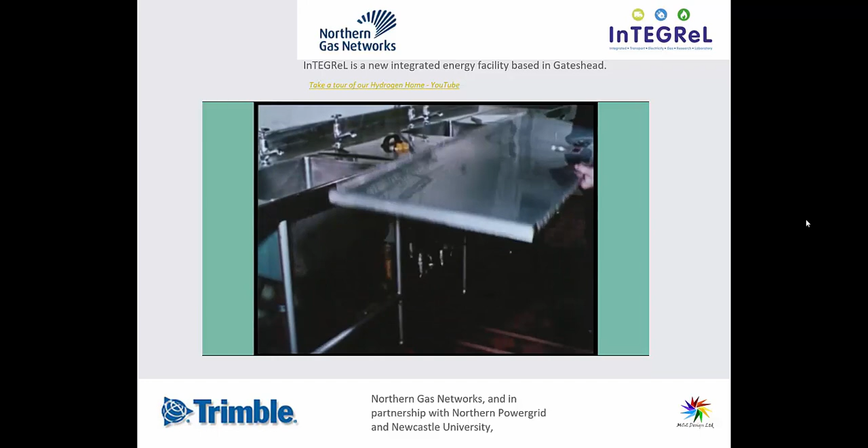Hydrogen can replace natural gas because it doesn't create any carbon when used. Switching to hydrogen will allow us to heat and cook in the same way, but with a gas which is more environmentally friendly. This is the first time the UK has explored the opportunity of using 100% hydrogen. Prior to the 1960s, the UK used town gas, which comprised up to 50% hydrogen before a national conversion programme to natural gas or methane.

We've been carrying out research in recent years to ensure a hydrogen network will be as safe as today's natural gas network. Following the completion of safety research, the government has committed to pilot using 100% hydrogen in communities. To do this, houses will need to be fitted with appliances similar to those showcased in the hydrogen homes. So, let's take a closer look at the hydrogen home. Follow me!

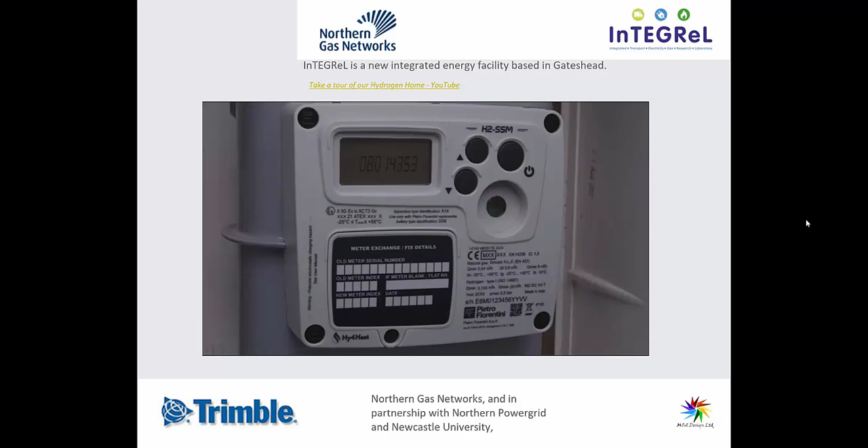This meter looks really similar to the meters that we use today, and it works in the same way. To create the same amount of energy as natural gas, we do need to use a little bit more hydrogen. The sensor in this meter enables it to measure today's methane, 100% hydrogen, or a blend of hydrogen and methane. This means that customers could upgrade to a hydrogen-ready meter ready for a future hydrogen conversion.

We use hydrogen hobs in exactly the same way as today's natural gas hobs. You start the hob and control the size of the flame in the same way. The main difference you will notice is the colour of the flame. When it's first lit, the flame is less visible, but after a short time it warms up and becomes orange. We call it the sunflower flame. You can use the same pans and utensils as with your existing cooker.

Like many modern hobs, a safety light shows when the gas is lit, and there is a flame failure device that cuts off the gas if the flame isn't lit or goes out. We've cooked lots of delicious meals on here, including curries, stir fries and fried eggs, and they cook in exactly the same way as when using natural gas.

Hydrogen ovens look exactly the same as gas ovens from today, and we use them in exactly the same way. The temperature range is identical. You can use the same cooking equipment and food cooks at the same temperature in the same time. The main thing that you'll notice is that the flame is a different colour. It's very pale when it's first lit and becomes orange as it heats up. There is a safety cut-off valve which shuts off the gas if the flame goes out or it doesn't light. We've cooked fabulous pizzas, mince pies, biscuits and Yorkshire puddings on this 100% hydrogen appliance.

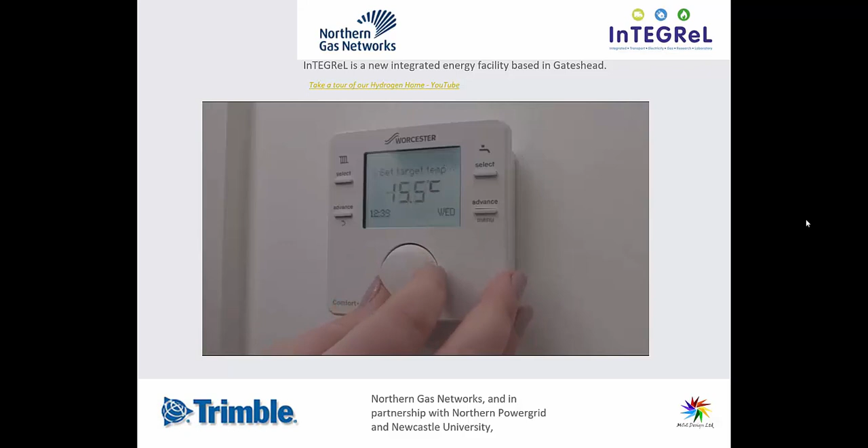The boilers here at Hydrogen Home are actually 100% hydrogen ready boilers. This means that they run on methane like your boiler at home and can be converted to hydrogen if hydrogen is made available in your local area. Leading boiler manufacturers have promised that hydrogen-ready boilers won't cost any more than today's boilers when manufactured at scale. To convert the boiler, a gas engineer will replace some parts, which takes about an hour. It's likely you won't need to replace any radiators, which makes switching to hydrogen quick and easy.

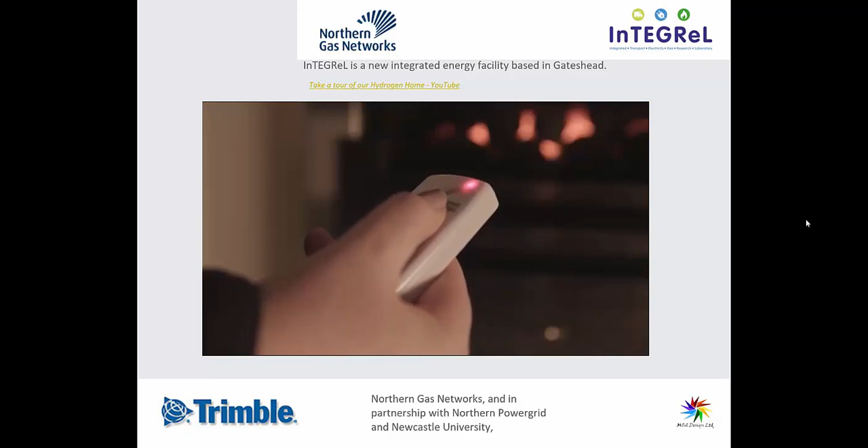This fire runs on hydrogen instead of methane, but you use it in exactly the same way. Just like the latest gas fires, you control the fire by remote control. It has a different burner to allow for a different flow of gas and air, but has a safety control which cuts off the gas supply very rapidly if the flame goes out. The main difference you'll notice is the colour of the flame. Hydrogen is very pale when the fire is first lit, and the flame becomes a flickering orange colour as it warms up.

So that's Hydrogen Home. I really hope that you've enjoyed your visit here today and seen the hydrogen appliances in action. I hope it's given you a glimpse into the future about how you can live in a very similar way but without emitting any carbon from your boiler or your appliances.